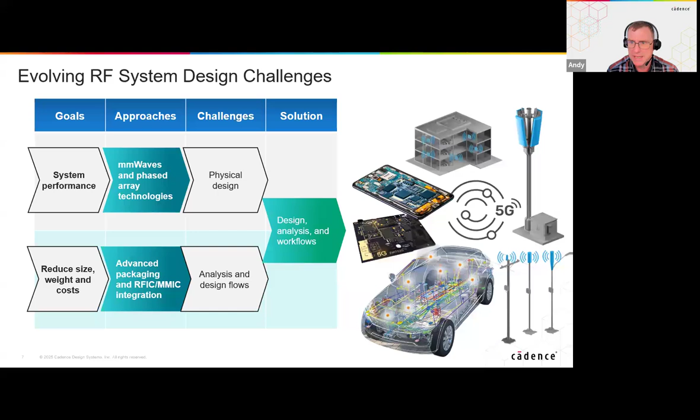Quite often I'm referring to electronic steerable antennas. We need to consider how we analyze those and the design flow that is appropriate for these to produce those physical designs, and to look at those physical designs and how they interact and perform once assembled and fully manufactured. And of course, what we're proposing today is the design analysis and workflows available to you from Cadence today.

Right now, the integration of Microwave Office, that's the AWR tool set, along with VSS, is part and parcel of the Cadence design suite. Virtuoso is for the silicon design at silicon chip level, quite often required for high integration for advanced node designs, be it memory or digital control. And Allegro, the PCB tools, is another platform that Cadence provides for RF microwave PCB layout, but also low frequency and power designs. And what we have today is an integration between all of those three tools working very, very nicely together.

That gives us the ability across all of the technical verticals, be it mobile communications, aerospace and defense, for example, to look at designing the digital, the analog and the RF circuitry, to be very process aware on the type of board technology, be that gallium nitride, perhaps for higher power designs, right through to PCB stacks, maybe on FR4, to consider that IC and advanced packaging, but also the routing around the board. It's technology independent. It's appropriate to use the correct technology for the correct requirement. I've mentioned gallium nitride there for high power, high frequency transmit chains, but also your very exotic laminates and multi-layer boards for high integration. And of course, perhaps the silicon devices, including the processors, the memory, the digital control.

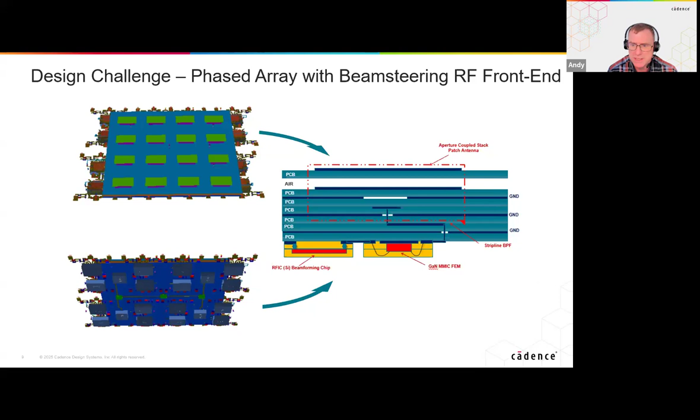In terms of the development workflow, one could start in one of two ways. Quite often, if you're designing from scratch, you'll start with budget analysis, and that's where VSS, the Visual System Simulator, sits. This is part of the AWR design environment, and allows us to do budget analysis, component selection and system architecture, looking at aligning the proposed system diagram and communications link going forward from there. It's in this tool that we do the phased array antenna synthesis, but that is synthesis. That is looking at the ideal performance of a perfect design without any of the degradation of the PCB board

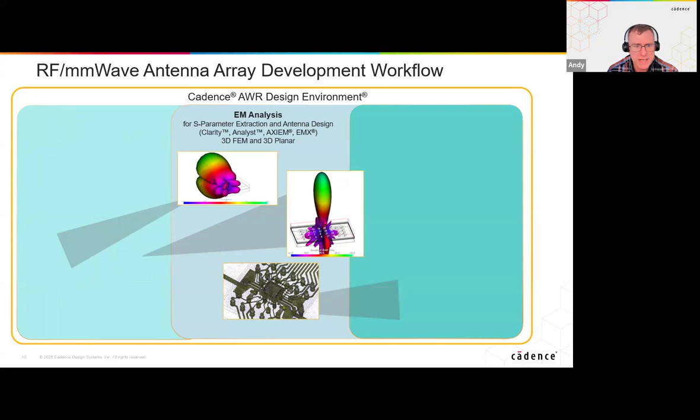sitting underneath. We can then take that flow into the EM world, either with planar tools or with true 3D FEM tools. Planar is AXIEM, 3D is Clarity and Analyst, and I mentioned a moment ago we could even do thermal analysis too, and look at the physical chips, the bond wires, the board stack and the solder balls, for example, in this lower picture, and look at the radiation patterns and the degradation in radiation going forward, and take that acceptable design and make a finished final layout using the tool to look at integrating surface mount components, the interconnect and the overall performance of this board design.

That's the flow one would take if you were designing from scratch, moving from left to right. And we certainly have an idea within Cadence that you shift left, you do more of this analysis up front before manufacturing the board, so that problems are found early on, resolved before manufacturing prototypes are produced, and you're able to design faster, in less time to market, and at lower cost than you might otherwise take if you make multiple prototypes and have to redesign those by finding the problems later on in the design flow.

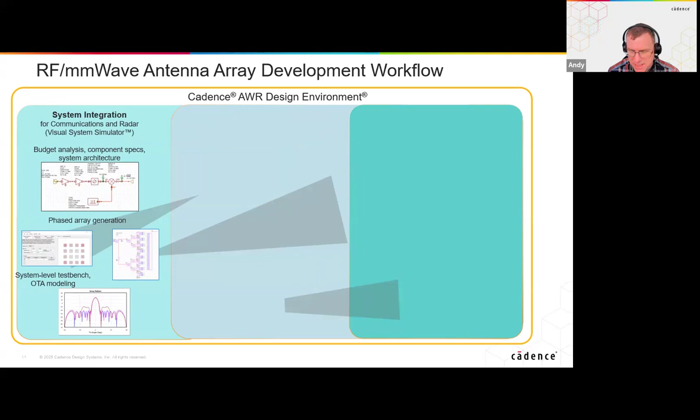Of course, there are customers that already have those designs, and we can import printed circuit board layout as ODB++, as IPC 2581, or as Gerber files. We can bring that into the design world. We can reverse engineer and analyze the electromagnetic performance, and we can reverse engineer the system performance back into VSS. The beauty of the tools that I'm proposing today is that you can work left to right for design or right to left for analysis. It works in both situations.

There are multiple design and analysis stages behind the development of quite a complex antenna array, getting to the point of PCB or package integration and those front-end RF electronics. But the flow that we're presenting today would start with the specification, the geometry and material definition, and the simulation and optimization of the proposed antenna array. We then take that concept and look to size that, the phased array wizard. This helps us to determine the number of elements, the orientation of those elements, whether we need to use a thing called gain tapering, adjusting mathematically the power transmitted to each of those elements dependent upon their position, and look at the far field analysis and beam angle steering of this design.

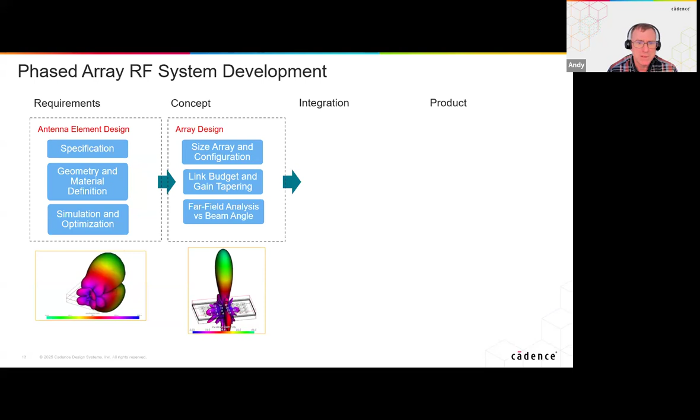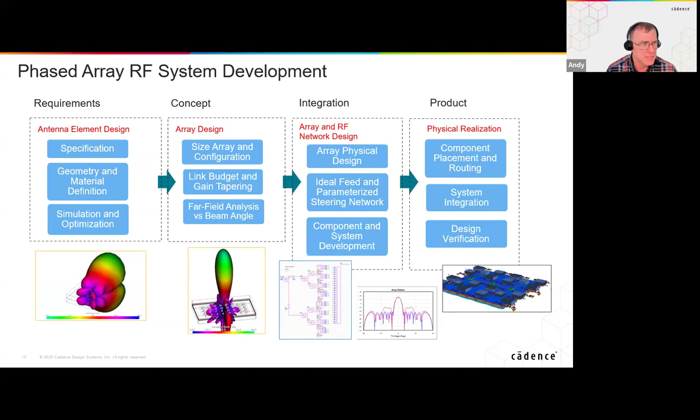We then need to integrate that into the product and make sure that we include not just the ideal feeds, but real parameterized components, maybe the steering components, the surface mount devices that will do the electronic control, and build this up to a final PCB board that we can physically produce. We're including there the component placement, perhaps S-parameter files from the devices that we've imported, certainly manufacturing devices that we can physically pick off the shelf and use going forward. We'll talk about more of those individually as we go through the slide deck.

So if we look at the tools provided by Cadence today, I've mentioned those on the left-hand side: the system planning tool, VSS, within Microwave Office, the material definition, the circuit level analysis, the parametric antenna design in the EM world, and the phased array generator. But of course, we do have Virtuoso for the silicon chip design. We can pull upon those silicon designs with a product called Virtuoso Studio RF and bring that silicon intellectual property, silicon IP, into the Microwave Office tool. So for example, if you were doing a beam steering IC, that could be included in the simulation at circuit level. And we can push those tools over into our PCB platform.

That's Allegro or Allegro X today. That also includes the Advanced Package Designer, APD, in order to continue the PCB design if it requires more digital design, more power or low frequency design over and above the RF sections. And of course, Clarity, the 3D EM tool, works with the whole flow. It doesn't matter whether the circuit level was designed in Microwave Office, in the EM tools inside the Microwave Office tool, or whether designed in Allegro and taken into account the full board.

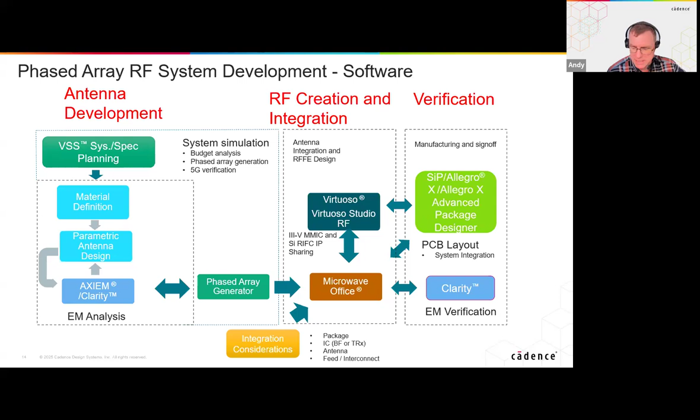So let's get on with our system specification then. Back of an envelope calculations, we refer to this in the UK here as a way of estimating the design in a very simple form and format. The table on the right is what we're going to talk to in just a moment, but we're looking at the receiver sensitivity, the signal to noise requirements, and in particular the path loss over something like a 200-meter link. I appreciate this is not massive distance, but it's just the vehicle to explain this particular design platform.

We're always limited on Earth with thermal background noise. Minus 174 dBm is the minimum you're going to get here, unless you go up into space, perhaps. And we add to that the bandwidth of the signal that we're working on. We're working on a 850 megahertz signal here, and this is up at 28 gigahertz. So we have our base thermal noise floor of minus 85 dBm.

850 megahertz bandwidth at 28 gigahertz that we're sitting at. This is the lowest power level that we would expect to operate in the system here based on Earth. We're giving ourselves a 6 dB offset for the noise figure, taking our noise floor to minus 79 dBm, and a signal to noise ratio of 4 dB before the antenna. That gives us a minimum received power of minus 75 dBm. This is dBs in milliwatts received at the receiver that we're able to have an operating link.

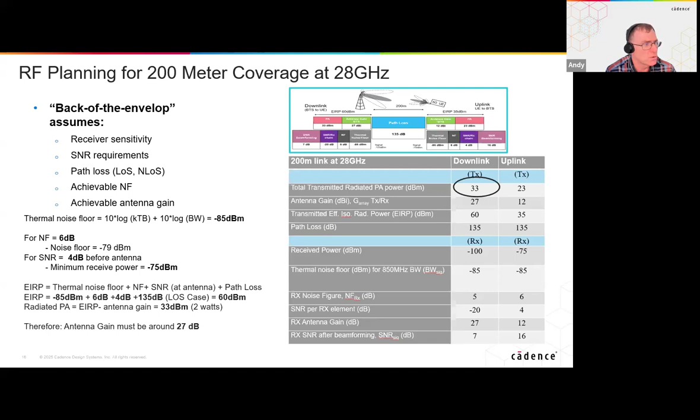So I mentioned VSS, the systems block diagram tool. That's where we start looking at this. And if you didn't want to do back of the envelope calculations, you're able to put these figures into our system simulator tool. So for example, here you will see, when I advance the slide, that we have our 135 dB massive path loss as the path loss.

We're assuming line of sight, but the model itself can look at multipath bouncing, perhaps from the ground or from atmospheric reflections. We have the transmit power of 33 dBm coming from our transmit amplifier, and the proposed gain here of the antenna of 27 dB. That's what we're hoping to get from our phased array antenna design. That will be clearly dependent upon the number of elements, the spacing, and so forth.

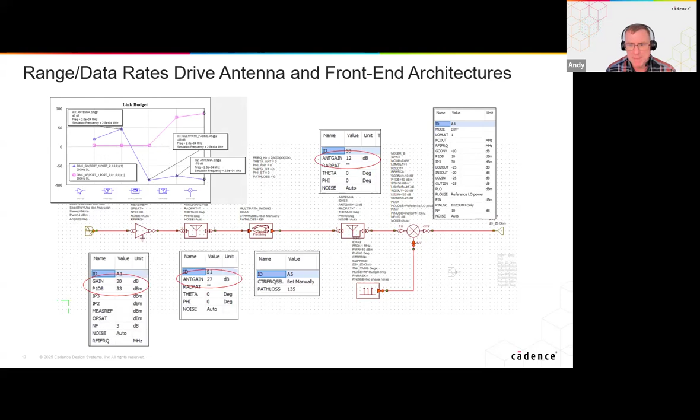We've also been asked about the data rate. At the moment, I'm assuming a CW signal, but we will look at one of the final slides, looking at a 5G live test signal going through this design, and the data rate would be set there. We've got some receive antenna gain in our receiving unit, and looking at the link budget analysis, we can propose that that link would work, assuming that we had 27 dB gain from our antenna. That's our magic number, and that's what we're going to work towards with the proposal for our phased array structure.

Now, within VSS, we don't need to use a single transmit antenna with ideal antenna gain. We could in fact import measurement data files. This is phi and theta, a measured angle into an antenna model, and sweep that. That's the one that we have on the right. Or we could have just an antenna radiation pattern that we can import and use that directly. These are behavioral models still in the VSS tool, but they're still relatively ideal. They're isolated antennas that are behaving themselves.

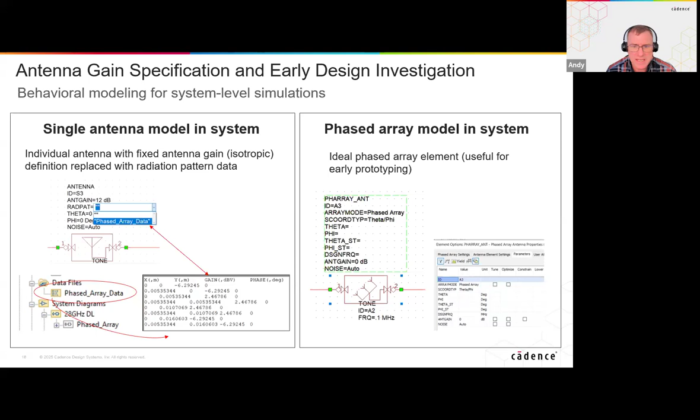What I'm going to propose in this webinar today is that we use the phased array wizard. This sits under the wizards branch in the project tree of the Microwave Office software, the AWR tools. And in that phased array wizard, we have various tabs that we step through. We step through those and look at the array control and general setup, the array geometry. And what we do today will be a lattice on grid, on a square or rectangular grid design, but it does not have to be that way. It could be circular. We could have custom coordinates for the arrays.

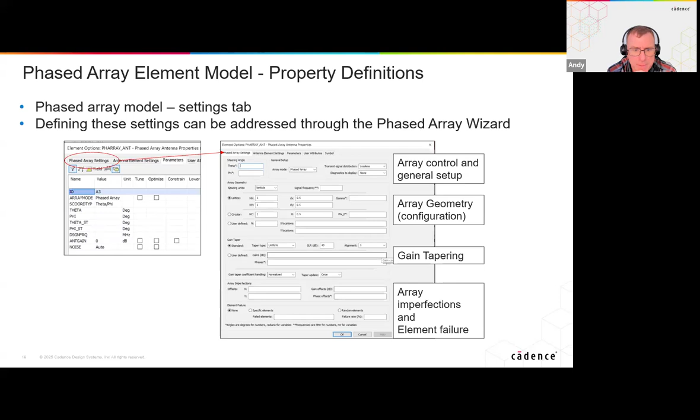And we can also look at producing gain tapers. There are normally three generic gain taper approximations that are used in phased array work. Obviously, uniform is the same power to every patch, but we have the Dolph-Chebyshev approximation or the Taylor approximation, where as we get closer to the antenna elements on the edge of the array, we start to reduce their power levels to help shape the beam. Again, you'll see some of that in future slides. Within the phased array wizard, we can even look at array imperfections and start to damage or disconnect some of those, either intentionally or random, to look at element failure and the beam shape when we're undergoing failures in the design.

The tabs allow us to set up, as mentioned, the lattice, the antenna gain for the individual antennas. In our example here, we're going to set that to around 5 dB per patch and have the multiple array elements multiply up and give us an overall antenna gain of 27 dB for hitting that budget analysis that we mentioned a moment ago.

The recommended amplification level, we had a question just now, for the chain can be input here. We have the ability to add that, and you'll see in a moment that we're working on 33 dBm drive power. That's 2 watts coming from the transmitter.

We click on the phased array generator wizard. We go through the analysis setup, and we propose the transmit and receive frequencies in here. You can see that we have the ability to look at importing antenna radiation patterns too. But more important at this stage, we're proposing a layout topology, and this is a 2x2. There is our individual antenna gain that we're proposing we can achieve per patch, and at the moment it's set to 5 dB. You'll see the single patch design in a moment as to how we achieve that.

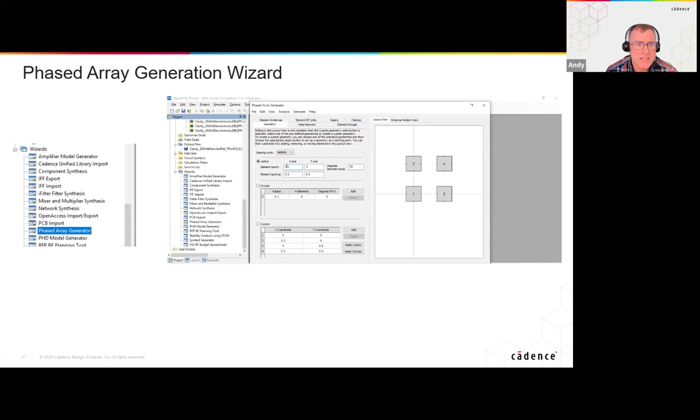Now we can go through that geometry, and as a 2x2, i.e. a 4-element array, we can look at the proposed synthesized radiation pattern, sweep frequency, and make sure that we're getting the expected radiation gain. You can see it's very light here at 21 dB. It's not enough with a 2x2 patch, a 4-element. So we increase that. We take that perhaps to a 4x2 or maybe even a 4x4 patch in order to achieve that overall transmit gain.

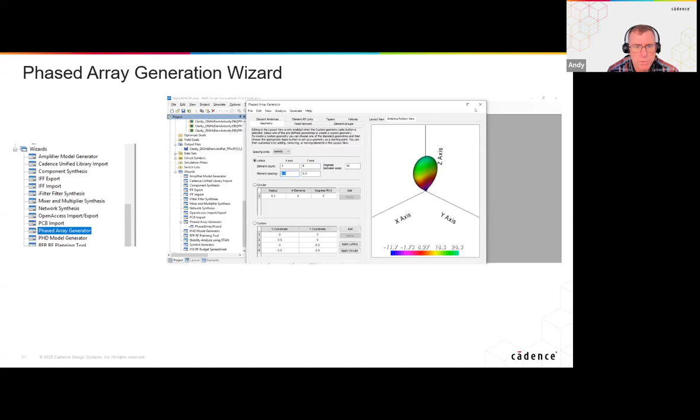You can see here that we can play around with the tapers in the synthesis tool and certainly focus that power on boresight, and you can see the antenna gain increasing as we do so, to the point that when we get to a 4x4 or 4x8 array, we are within our 27 dB gain requirement. So that video there was to show you, but I'll show you in the software as well in just a few moments. We're assuming an individual patch gain of 5 dB for this example, and that when we array that across, we get more than 27 dB, in this case ultimately relying on a 32-element, 4x8 array of patches if we include gain tapering.

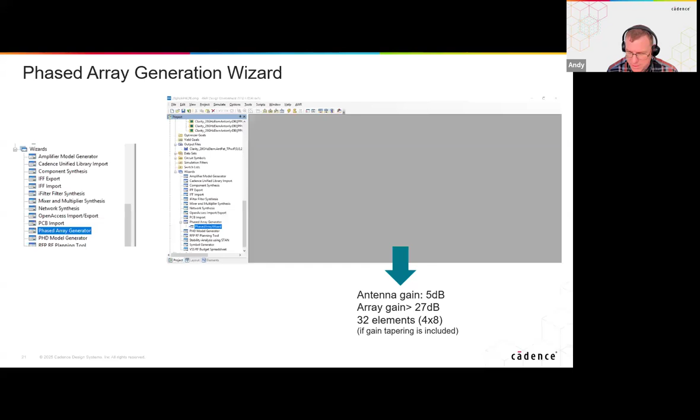Advancing through then, how do we do this design work, and how do we go about physically doing the elements? For the paper, this webinar, we're basing the individual patch antenna on a particular design that's proposed by this gentleman here, David Pozar, back in 1985. It's the idea of a slot-fed antenna. So at the bottom of our board stack here, we have our drive line. We have a ground plane with an open slot to help focus.

We have a focus patch on one layer, and actually to enhance the bandwidth, a second focus patch on a second layer above, but with air between the layers. It's quite a complicated stack of material. We can scale that to operate at 28 gigahertz, and there's actually a tool to help us set up the board stack of material that you'll see in just a moment. Now, on the live example that I'll show you in the software, I'm not going to be designing this one from scratch. There are too many variables to get wrong in a live demonstration, but I will show you a single patch antenna and how we set this up.

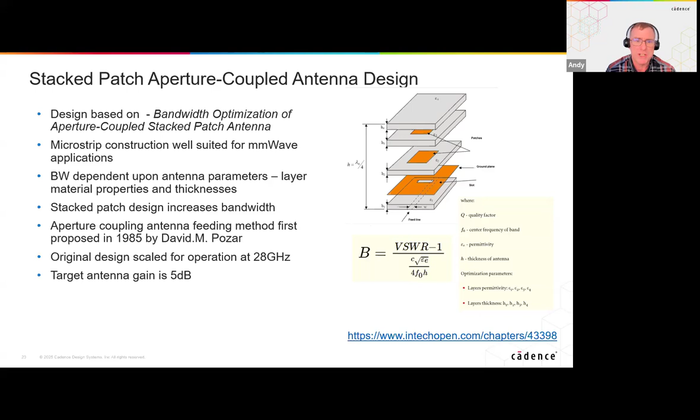So in the real design, we have a multi-layer, multi-PCB stack of material. Here you can see a cross-section of the feed line coming from our surface mount devices on the bottom side of the PCB board, a gallium nitride amplifier, and beamforming chips all controlling the beam power and direction, feeding through to an element here that is effectively our transmission feed line, feeding through that slot that I mentioned in the ground plane, our bottom patch, an air gap, and our top focus patch. Now this is on our stack of board material you can see here. And what I've done in the actual project is I've set as a variable the air height and the height of this last substrate layer, so that we can optimize those. They've been set to H1 and H2, and indeed we've got a large air gap behind the bottom side of the board. So it's important to get those right and include those.

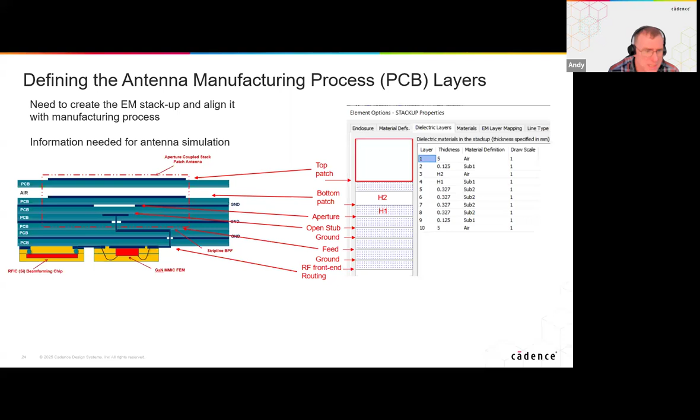There is, as I mentioned, under the tools menu, a create new process, and that allows us to go in and set up the PCB stack of material. We simply go into the software, we start this new process wizard, we define the number of layers. Sorry, it's quite small here, as perhaps an 8 or a 10 or a 15 layer board. We explain and set the various permittivity layers.

So you can see here I've made my air gap, and indeed we can actually optimize some of these layers inside the tool. That wizard will generate all of the interleaving via models, both as a solid through via, but also all of the independent via lines that go between layers, and give us the option to choose those in what we call the process design kit. That really is for another webinar, another day in terms of its own setup.

If we come down, we've got a small video here talking through again how that's done. So we go in and specify the parameters that I've mentioned. Those parameters can be set from the create new process. You'll see it here, and we can change the permittivity of certain layers. We can add metal conductors as ground plane or not, as the case might be, and define those via holes as we go. So that is our starting point for the PCB stack within Microwave Office. That gives us the ability to use all of that technology board stack as proposed by the original single element antenna array design.

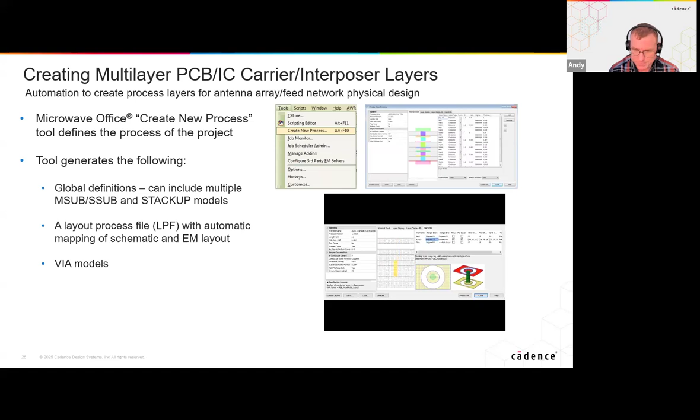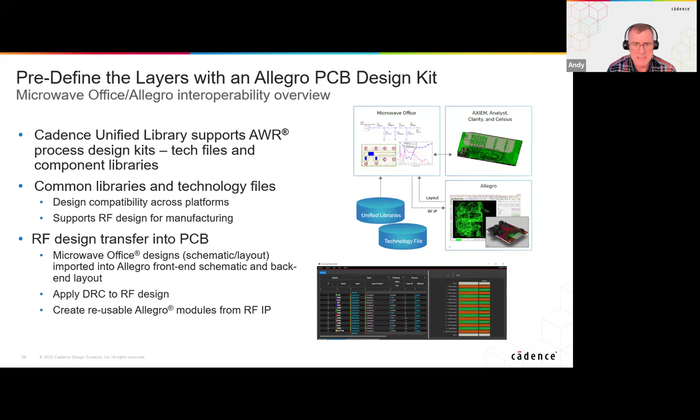Now, of course, Cadence do have PCB tools. Allegro is our PCB package, and we can, of course, interface into that by reading in the unified libraries from Allegro. Having exported the technology file, we could bring in the board stack of material from Allegro directly into the PCB tool. That allows us to design inside Microwave Office based on a printed circuit board stack of material, the properties, the thicknesses, from the Allegro tool in the first instance.

So let's go on and look at the individual antenna. That's the one I've just mentioned in the paper by Pozar. The idea of an upper and lower patch, the air gap, the aperture feed. What we've done here is we've put together that design in an EM structure, an electromagnetic structure. It's planar in nature, so there are layers, so we can use a method of moments tool in our product that's called AXIEM.

Although we've set design dimensions for the patches, you can see here on the screen that we've grabbed those elements and we've set up parameterized optimizers. These are just parameterized modifiers that allow us through the optimizer to change their values. And hopefully you can see on the right-hand picture here, that's both the length and width of the patch, but also things like the size of the slot. And on the bottom corner there, you can even see that we've optimized and set the offset center of the feed transmission line under that slot.

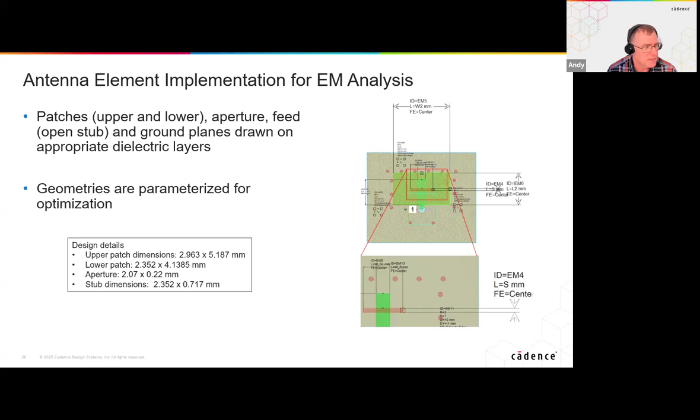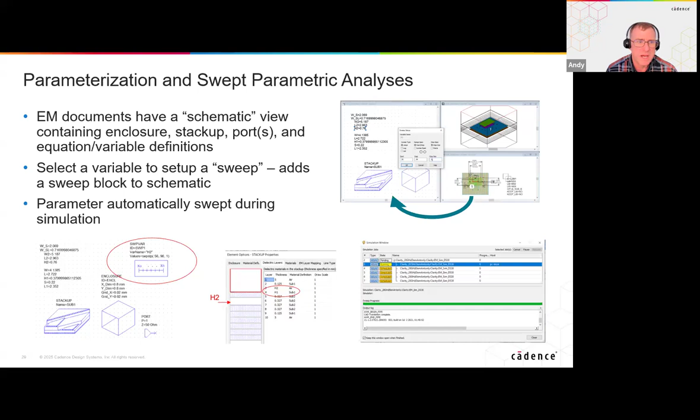Now in 3D view, you can see it here in the AXIEM tool. We've got the layer stack of material from the Create New Process wizard. We've got on the bottom right-hand corner the optimized elements that have been set, and we've set up those parameters in the EM tool to allow us to optimize them. We have various optimizers inside AXIEM, but the artificial intelligence one, we've called it the pointer optimizer. We'll use different methods, and we can either do multiple point sweeps and extrapolate the best answers, or we can let the optimizer hunt down the best performance.

Now that's not just the case on the top of the patch, but also on that feed line on the bottom lower layer. And you can see that once we've run that optimizer, we were aiming for 5 dBs of gain from this patch. In fact, we're generating 9 dBs of gain from a single patch, more than required for our antenna array. That might mean that we can get away with a 4x4, a 16 element patch, rather than a 4x8, a 32 element patch ultimately. You can see here that we've got reasonable return loss across the band of 9.5 to 12 dBs. And these results are shown for an air gap height of that air layer of 0.76 millimeters.

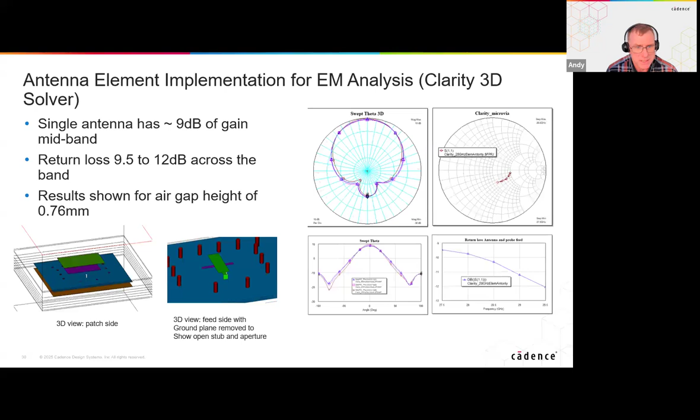With the ability to speed up the electromagnetic analysis with parallel simulations. So at the moment, as that standalone design was run on one computer with one license, you're looking at about 52 minutes to solve that with the optimizer and come up with a solution. That's running locally on one machine for the planar tool.

Or we can actually run multiple licenses on multiple machines, either on the cloud or on a compute farm on site, on premise. And that drops our simulation time with this planar solver, even with optimization, down to around 6 minutes on the compute farm that I had access to. This is running effectively 3 licenses over 6 machines. That's 18 licenses or 18 sets of tokens. But the solve time is an order of magnitude faster.

This isn't taking very long to solve that critical problem. And we end up with a design, as you saw there, of the patch. Now that was done in a planar tool. We can, of course, copy this directly across and run this in the 3D FEM, finite element method tool, Clarity, or today Analyst in Microwave Office.

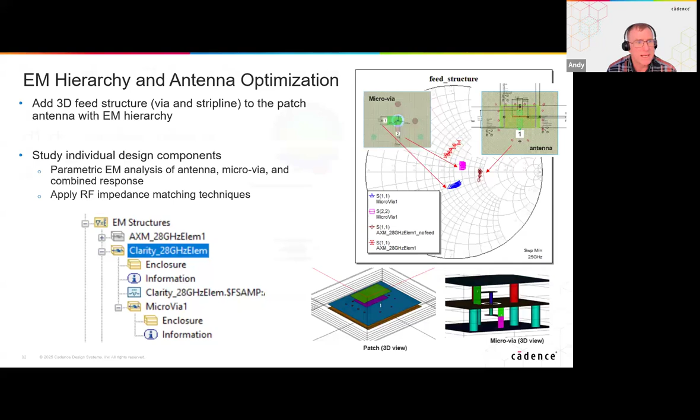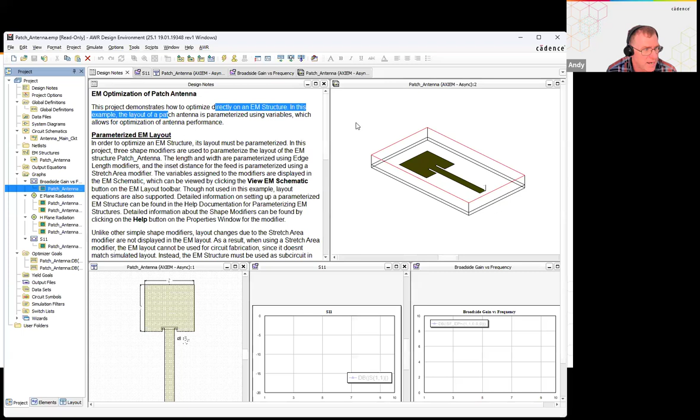Now, because I like demonstrating the software live, let's jump to what you can see now, which is Microwave Office. Here is a planar patch antenna. It's not quite the multi-layer design. It's simply an edge-fed design. We've done this by drawing shapes. The shape modifiers that I mentioned, we simply pick up the shape and draw parameterized modifiers against any of those design elements. Once we've got that set up, we can simulate that.

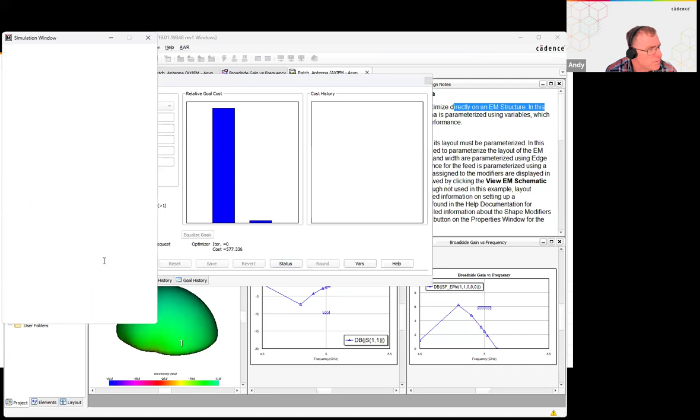That simulation is running on my local machine while I'm sharing my design, and you can see immediately real-time simulation results from that design. If I go and view all here, you see the radiation pattern that goes above a ground plane and the values here. I have set up optimization goals, so we can go through the simulate menu and into the optimization. As I mentioned, we do have artificial intelligence under the pointer. In this case, I've got a grid search. And to give you an idea of the simulation time live on the webinar, I've hit go.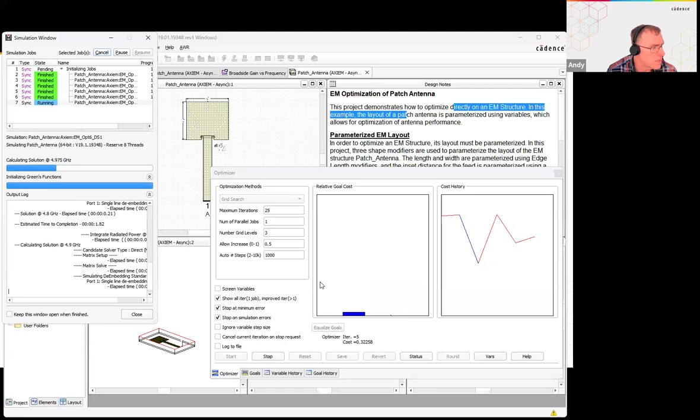We're doing multiple frequencies. I appreciate it's a slightly simpler patch, but you can see the software now hunting down the results that you see here on the screen. What it's doing is changing the size of these parameters. And hopefully you can see this patch dimension changing as we go. It's now done its 5th iteration. And I asked it to stop at the best value of performance. So here it's set to stop at minimum error.

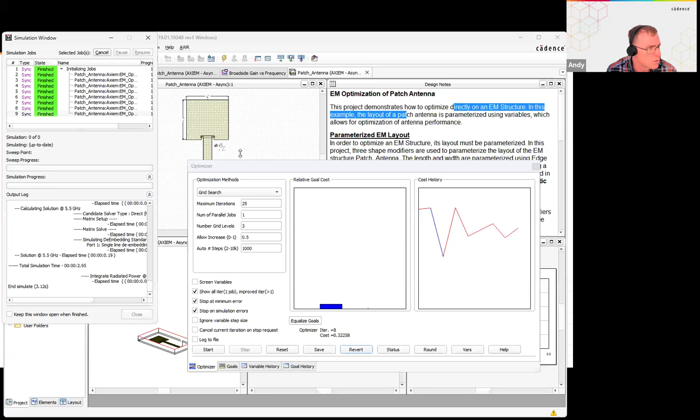So when we stop here, you'll see that what was off-grid in the first instance is now designed to be a nice 5 gigahertz patch. On the webinar material, we simply centered this around the 28 gigahertz frequency point. Here's the final design with its given dimensions. If I revert back to the original, you can see that there are different dimensions, and that was originally off frequency in the design that we had as I brought that in.

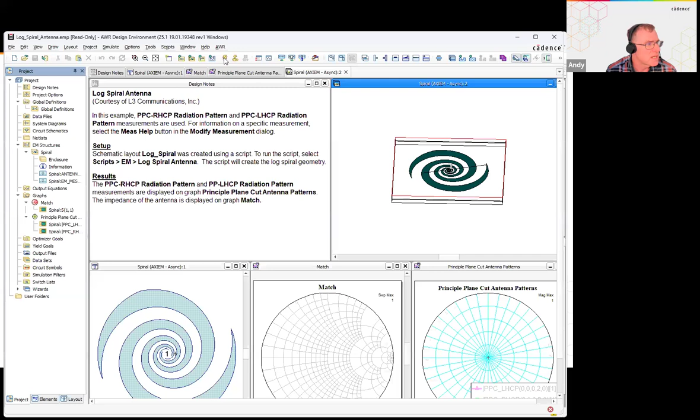Now, I think we had a question about antenna radiation pattern types. It just so happens that I've got another antenna here. This was a log spiral that was done, an imported design. And in this case, when we run the simulation, once again, live for you during the webinar, I've got that set up. Apologies, because I was using multiple solvers.

You can see that we can look at the radiation patterns, and those radiation patterns give us the ability to look at polarization, at transmit radiation direction, and match of this antenna. So I hope that's useful. Let's come back to the slides.

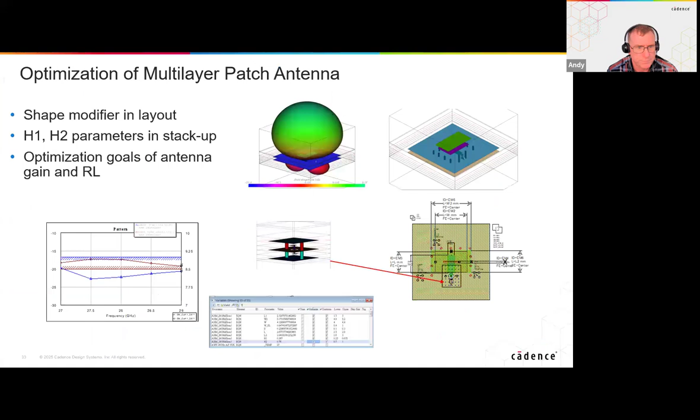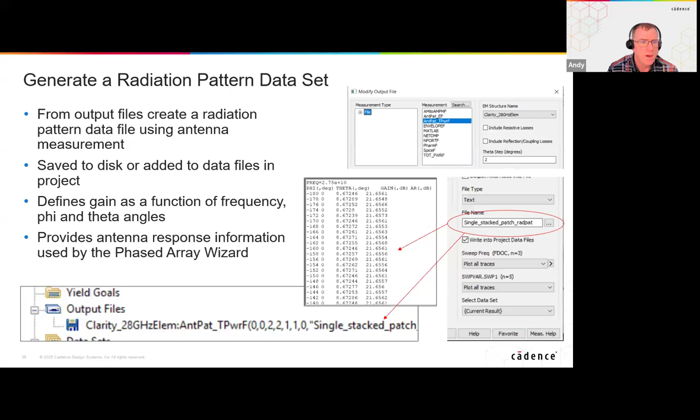We'll talk now about the phased array generator. Once you have that single patch done, what we can do is either generate a radiation pattern from that and use that as data inside the wizard itself, or we can simply go away and use that wizard. You saw a video slightly earlier on, and set up that patch array to look at the performance on the synthesis side of the tool.

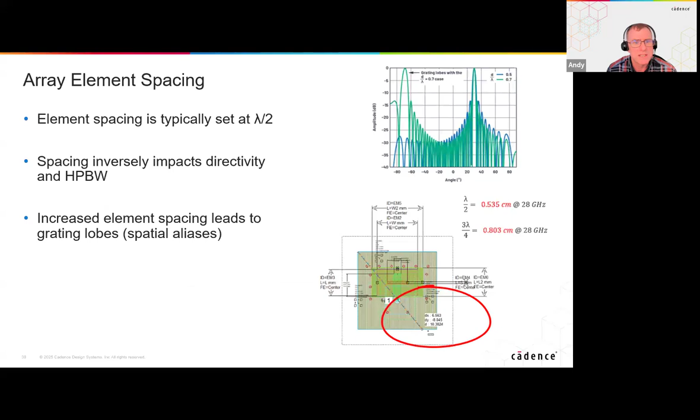Now, we do have to have some thought about grating lobes, we call them, spatial alias. This is dependent upon the wavelength of the patches that are separated, but the synthesis tool gives us the ability to trial those. And it's very, very simple to drive. Let me drop back into the software.

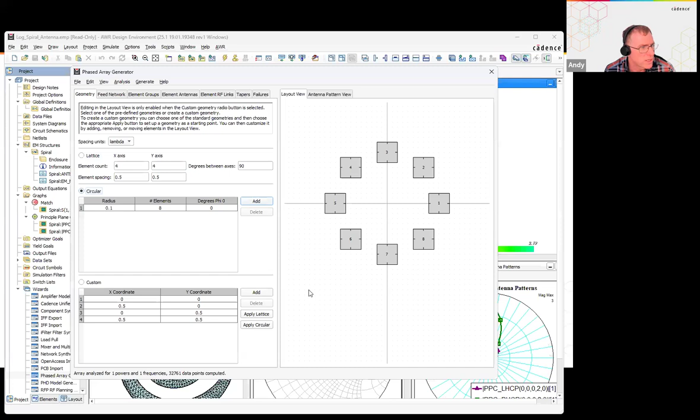Under the wizards branch here, you see that we have the ability to go into the phased array generator wizard. That gives us the option to, although shown as squares here, I'm going to use my circular polarized log spiral antenna. Decide the number of elements. They don't have to be rectangular, as I mentioned earlier on. They could be in a circular pattern. They could be on a custom coordinate location.

And whilst we're synthesizing here, having added the frequencies and other information that we need to edit, we can in this tool start to look at the radiation pattern. And that radiation pattern gives us the ability to look at the synthesized performance of this design and look at the idea of adding tapers and taper control. Could we focus that beam with mathematical approaches? Most definitely. Could we look at using a better way to focus that beam? The Taylor approximation of the way that we feed the power gives us the best concentrated power on boresight.

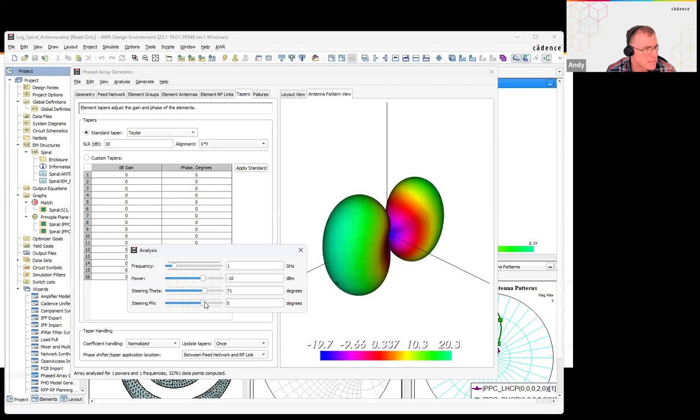And what about then when we steer this beam around in the synthesis world? Can we look to steer that in the X, Y, Z directions? Most definitely. And this is all under the synthesis side. But once we've finished the synthesis, we simply go into the generate menu, generate a schematic layout. This will populate this with AXIEM.

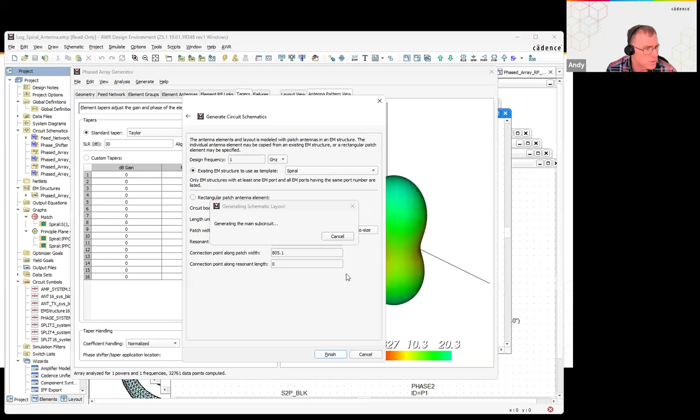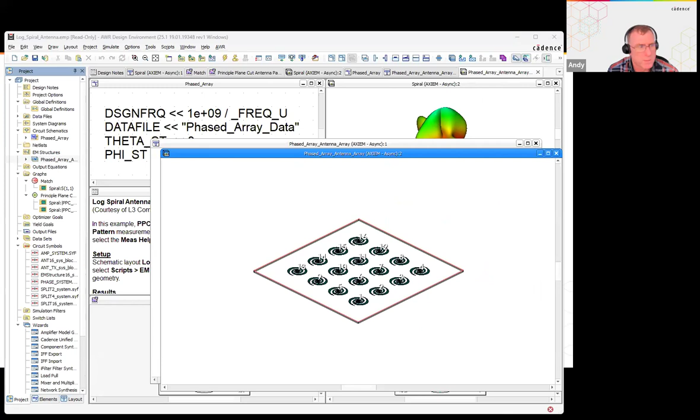And if we have underneath a design that we've already generated, you saw my log spiral antenna just a moment ago, we can use that as the individual element. And the minute we finish this wizard, the software goes away, it automatically populates the AXIEM 3D planar method of moments tool, generates the measurements that we require, and it comes back with effectively a final solution. Apologies, I've got some windows on the other screen just here. And you'll see that sitting under here, we have a phased array design in 3D on a 4x4 grid with our log spiral antenna. So very, very easy to drive that synthesis tool. Let's come back to our slide deck for now.

Once we have our proposed antenna array, we need to go away and consider how we drive that electronically. I mentioned that we were using a 33 dBm or 2-watt amplifier chip. I've gone away and I've found one of those devices, in this case from Qorvo. You can see on the left-hand side here, we've got transmit small signal gain of 27 dB. We combine that with our antenna of 5 dB gain. We get close to our 30 dB radiation that we need per patch. And that is imported either as S parameters or as a non-linear model for simulating in Microwave Office. We can import the package outline, and that package outline becomes part of our feed network.

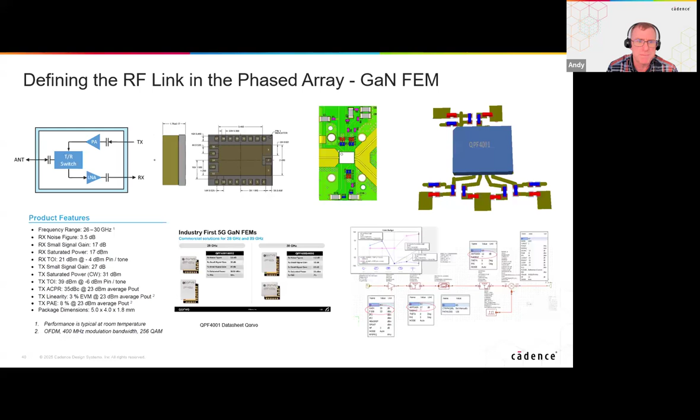Not an ideal amplifier in VSS, but the feed network inside Microwave Office. We can do the same with the transmit receive switches and import their Gerber outlines or ideal profiles and start to feed those together with the circuit level design, where we import the surface mount components for the electrical control of this antenna.

What I'm proposing doing is in the proposed electrical schematic diagram, rather than have ideal switches as behavioral models, we're replacing them with the actual device. We're using routing inside Microwave Office, or routing between the devices, to draw our PCB tracks. We're using surface mount splitters, or perhaps drawn splitters in the topology of the board stack. And most important and critically, we're taking the feed, you can see on the bottom right corner here, to all 16 antennas and treating that as one lump of interconnect that we throw at the electromagnetic simulator.

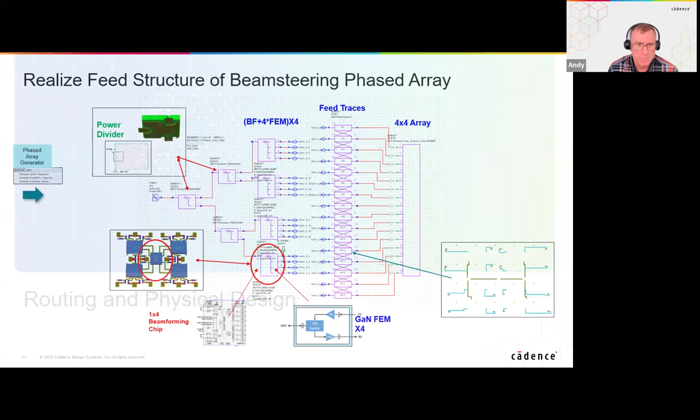What that will do is pick up the coupling of those tracks, their interaction with each other, and that can also then be included in the overall design as an S parameter file, picking up the interactive coupling between each of those patches and the feed lines that are going on. So that routing and physical design, as I've mentioned, we take out to an EM tool.

It would automatically put on the ports. They're no longer ideal transmission lines or strip line models in the circuit level simulation tool. They really do have material loss, roughness. They are buried inside the PCB stack. And if we have 16 of those that all couple together, we do find that there is a return loss.

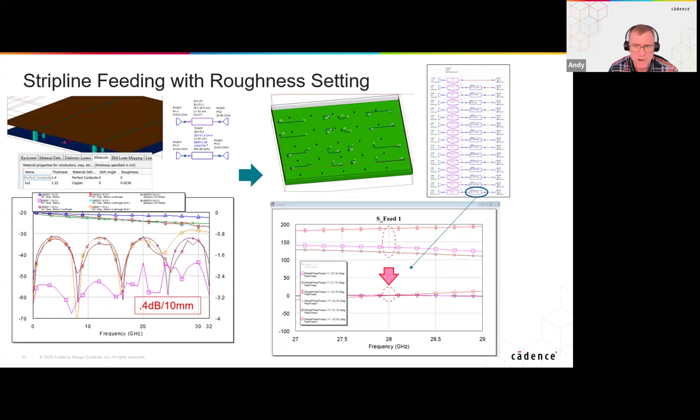We can look at their phase response to make sure that we're getting the right phase, the appropriate patches. And you can see here a return loss of under minus 30 dBs across our band of interest, in this case around the 28 gigahertz mark. We do have some loss. This is real copper. So on the right hand side there, you can see that we've got about 0.4 dBs of loss per 10 millimeter strip of the transmission line track. That means that we have to be careful how long these lines are on the control.

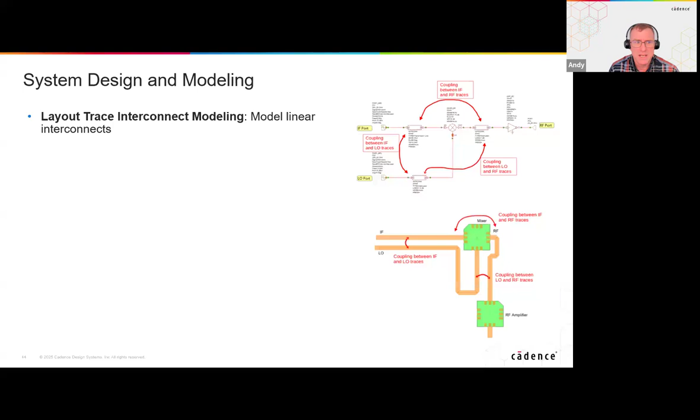Now, just to mention, if you were only using the system simulator VSS, we do even have interconnect models in there today within the systems tool. This can pick up the EM simulation as an S parameter file, and it would include the cross coupling between tracks, for example, the IF and the LO feeds, the RF output trace that might be driving into our RF amplifier chip and how that couples back to the local oscillator. And the S parameter file from that EM tool can be used purely in the system simulator. Remember, of course, that's a linear only interconnect that we're including in the simulation there.

So let's move on to the simulation results. We're coming towards the top of the hour. I've spoken about the individual patch. I've spoken about some of the control electronics. Let's look at the final board as we close out this webinar before we take some questions.

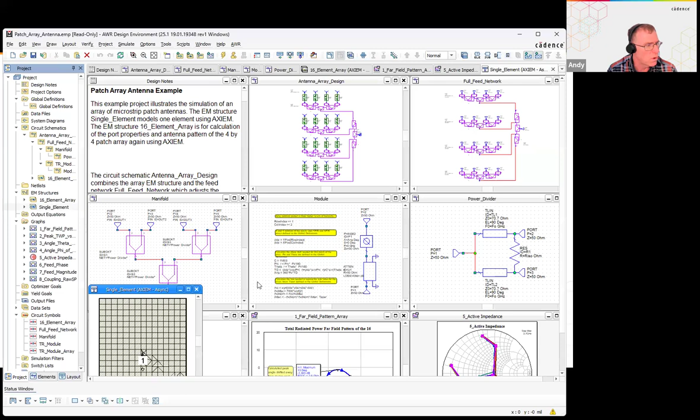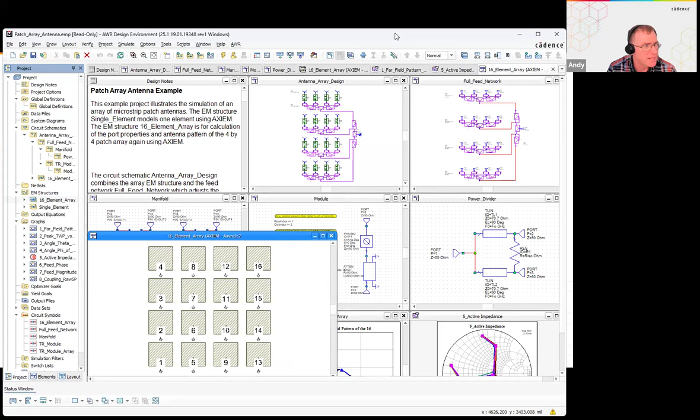This example is taking a very simple single element array patch that you saw a moment ago. This was the feed one that I had. In this case, not fed from the edge of the board, but fed from a port in the center as a coax feed underneath the PCB board. What I've done is I've used the phased array generating wizard to go away and generate effectively a 4x4 array patch, very similar to what we have here, but just with a simplified single layer patch. This is one patch on one layer of PCB board stack. Let me just switch off this 3D animation for a moment.

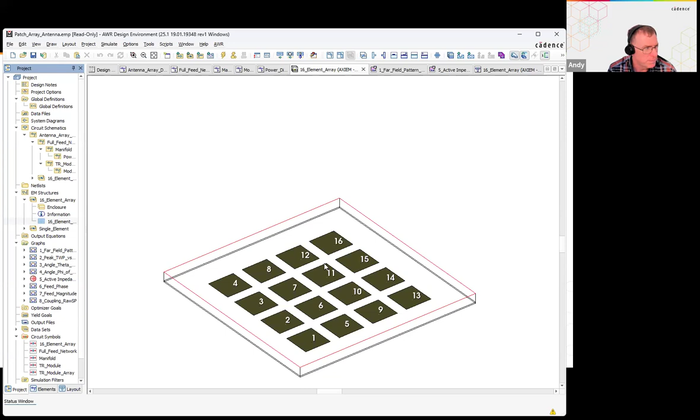Right click, toggle this off, and you can see our board stack on top of one microstrip layer. We have no air gap here. We have no fancy feed transmission line through a slot. This would not give us 5 dB antenna gain in this design per patch, but it is a nice vehicle for me to show you how we run the design.

Now in here we have at the top level a circuit diagram that uses the EM structure as a subcircuit. That subcircuit, in fact, that's the wrong one. Let's show you the right one. It's this one here. That EM subcircuit is the 4x4, the 16 array patch that is used as a subcircuit, and we're driving that from Microwave Office with a real drive signal, in this case plus 40 dBm.

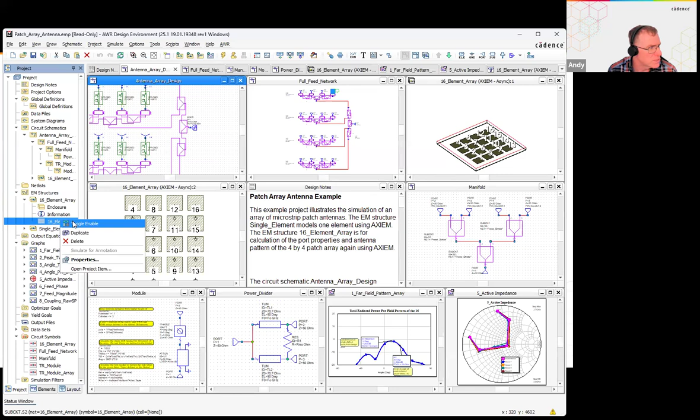The clever thing here is because the two tools are in the same platform, when we look at the 3D animation pattern of this simulation result, we can right click here, add annotation. And the annotation that we're adding is a planar EM 3D current, field, or annotation pattern. So those allow us to add, as you can see here, the pre-simulated antenna radiation pattern off the board at circuit level drive conditions.

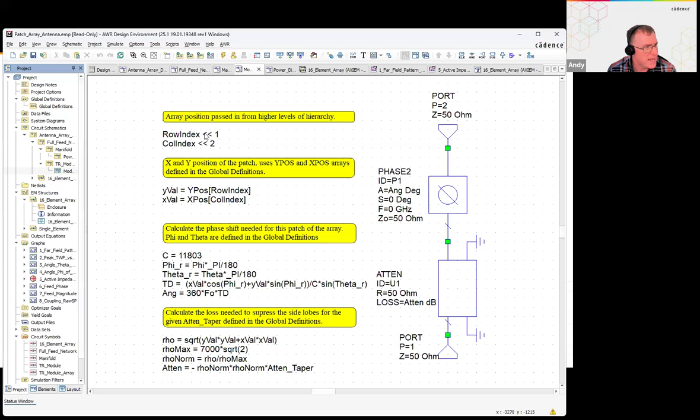Now that's critical because at the circuit level, we're controlling the phase into each of these elements. So each of these elements here is a control phase block, and we're controlling it by the X and Y position of that particular block. So there are 16 blocks in the design. We're controlling the X, Y position in terms of the phase, theta and phi. And what that means is we can, in simulation, not synthesize the performance of this antenna, but we can actually simulate and analyze. That's very, very different.

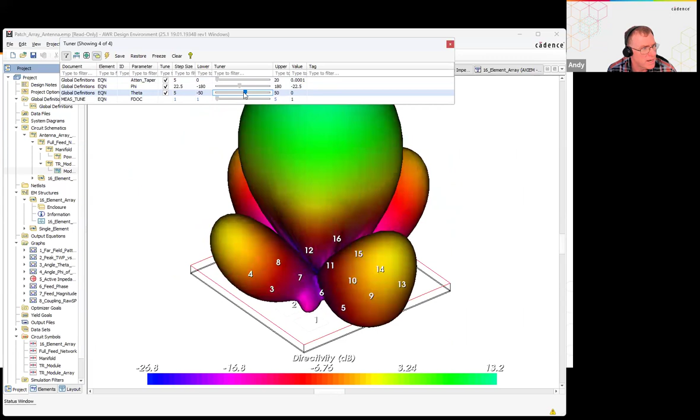The analysis allows us to sweep that beam as I change the values of the phase to each of the antennas, and you can see the side lobe patterns changing, the beam steering in both theta and phi if I spin this around. And we can look at the radiation pattern. As I've mentioned, this is not on a complicated board stack with the focus patch or the air gap. We are not getting 5 dB, and the overall 4x4 is only giving us 13 dB antenna gain from this configuration. This is actually a built-in example.

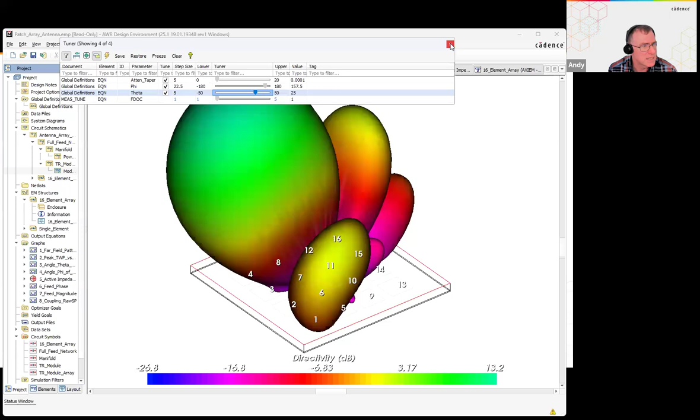Under File, Open Example, ladies and gentlemen, you can get access to this element in the software as we ship it. The File Open Example brings up something like 400 plus designs. And if you type in the keyword here, antenna, we have 27 of those. The one that I'm showing on screen now is this patch array antenna as a simple patch, but you'll also find one there that talks about the phased array generator in the systems world and that element, and the phased array file-based array antenna that we can open and show how those work. The log spiral antenna is also built into the tools that I showed earlier on, as is the standalone patch antenna that I use for optimization. So all of those are in the software already, available for you to explore and use to your heart's content.

Now, I spoke about that radiation pattern being run in the planar tool. That works very nicely when you've got planar elements, but of course, planar elements treat things like plastic cases as a complete infinite layer of plastic. They can't separate out in 3D the various air and plastic package layers. So this is an approximation using the planar AXIEM tool. Why do we do that?

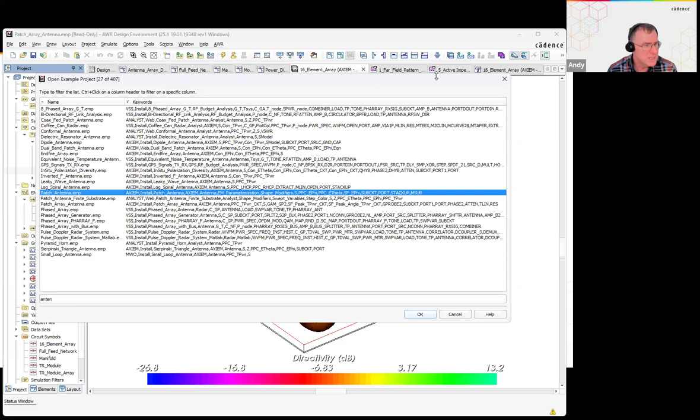It's fast. The simulation time that you saw for that last design, if I bring that back up, was typically around about 3 minutes on my single laptop with 8 cores. So it's a very, very fast design, even though we're looking at simulating a multi-patch array and looking at steerable beam conditions. What we really want to do is throw that design to the 3D tool.

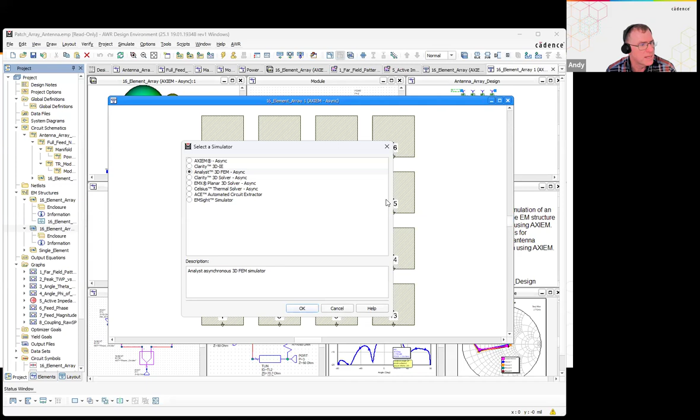You simply copy and paste the design. Again, back in the software, what you do is you literally drag and drop this design. It gives you an immediate copy. You right click on the copy, go into set simulator, and you simply then choose, instead of the AXIEM Planar tool, the Clarity 3D EM solver. That's it. You'll see that from there, we end up setting a box around the elements. Oops, sorry, I've chosen Analyst. I did wonder why it wasn't allowing me to do that. It sets a box around the elements.

It would set this up in a 3D tetrahedra solver and give us the results from that. No further changes, no import or export of files. It's very, very simple to drive the 3D tool. And I have a slide for that. It does, of course, take a bit longer to run.

Of our 4x4 patch running Clarity as a true 3D solver, you can see the return loss and the transmit losses from the patch array, and a similar radiation pattern. It's just a slightly different graphical interface here.

To give you an idea of solve times across multiple cores, with all of the layers and all of the surface mount components resolved down to a very, very fine level in terms of the FEM solve mesh, we're looking at around a 50-minute simulation time on a 20 gigabyte memory compute farm with 96 cores. I appreciate that's a large number of cores. It can be done on the cloud or on a compute farm, but 50 minutes simulation time for this type of integrated design is really quite impressive.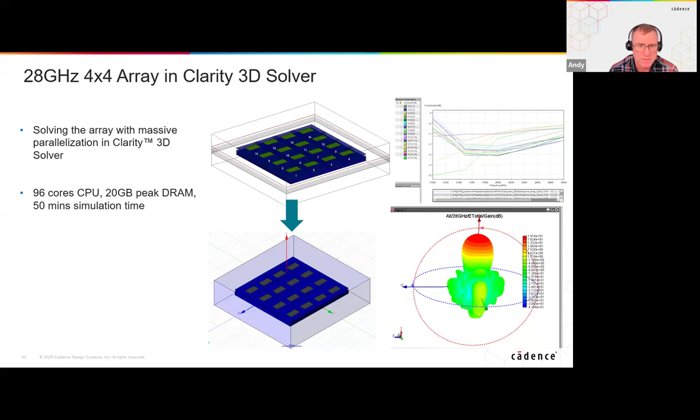So finally, we wanted to look at increasing that design, improving it, going to our proposed 8x4 array design. You can see on the bottom left-hand corner here, we've extended the hierarchy to include one switch. That switch is shown here on the bottom left corner as a green element off board, but that would allow us to start to cascade these 4x4 arrays.

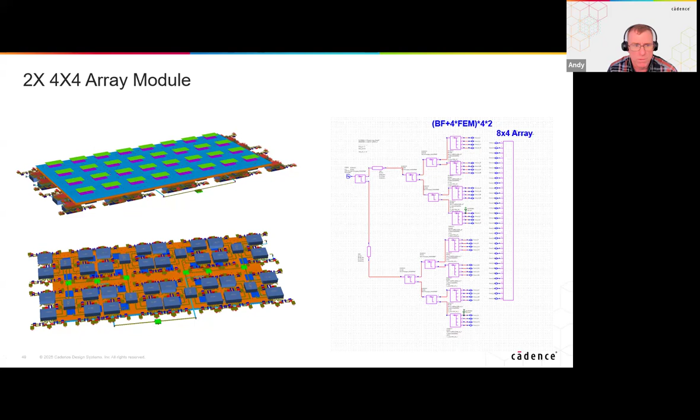And the beauty of that then is that we can look at radiation patterns of the 32 patch array, either on boresight with its interfering underlying signals underneath the board, or as you can see on the right hand side, if we injected and ran two signals, two individual users on different angles, can we simulate and propose and look at the power radiation from those angles and see that we're getting the expected transmit power. Remember that we now have doubled up the number of patches. We're expecting more than 27 dBs of gain from these antenna arrays. So a very, very powerful way of doing this type of design work ahead of ever producing prototype material, ahead of spending money and getting some results.

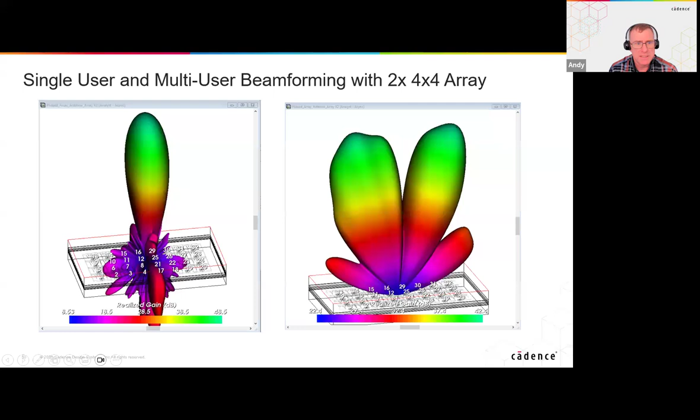What I've completely ignored is any type of filtering on the design to enable us to ensure we stay within specification of the band. So we had an earlier question on data rate. This is where it does become important to include data rate and modulation bandwidth in the system simulation tool. So I hope that answers that question too.

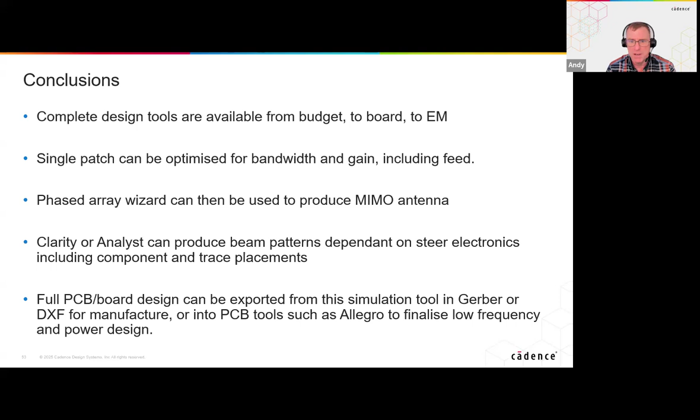I was showing you it with a tuning tool, but you can do that with sweep variables to cover all possible phase angles. And ultimately, of course, from that PCB design, we can export this into the production world through Gerber and DXF masks. Just to show you quickly, I had that full design in the software platform. Here is the 3D structure for the EM patch, all optimized for the feed line and the two patches with the air gap above, and the design that was used to do that with the parameterized shape modifiers.

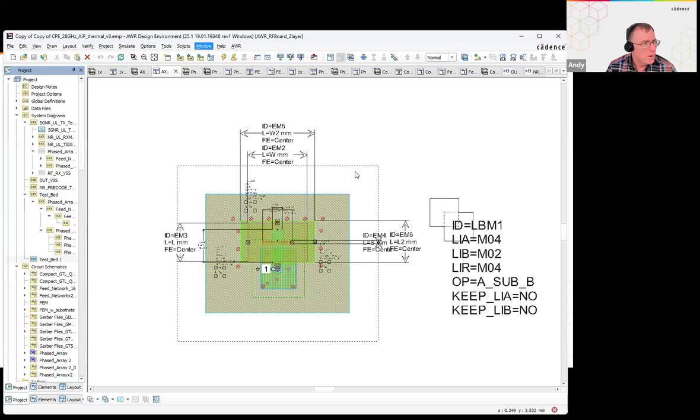This is all in one single project within Microwave Office. We have taken those designs, we've arrayed them across, we've added the surface mount components to make sure that we've got those amplifier chips and the electronic steering control chip. We can view those in 2D or 3D for looking at those elements and how they're grounded. This is part of the bottom of the board for one segment of 4 patches.

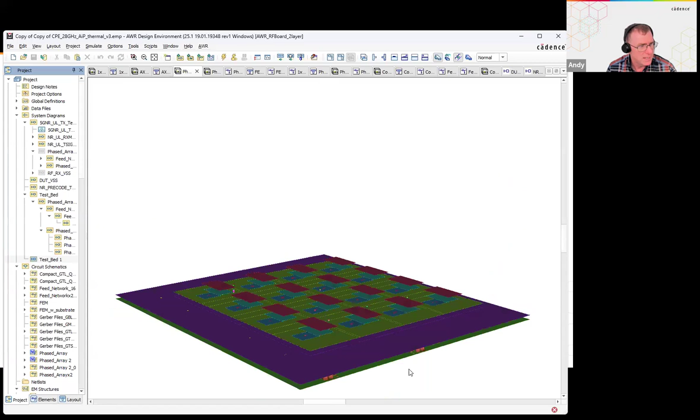And we've even taken that design and arrayed it across, not just for effectively the patch that you saw in the visuals, the 4x4 that does solve our radiation problems and gets us to the required transmit gain, but also in this same project we have the 4x8 patch, and that was simulated and solved in Clarity. I certainly won't do this live on the webinar. It takes around about 50 minutes, but that was looking at the feed that we sent as an ideal 4x8 patch array into the Clarity tool, all in one project.

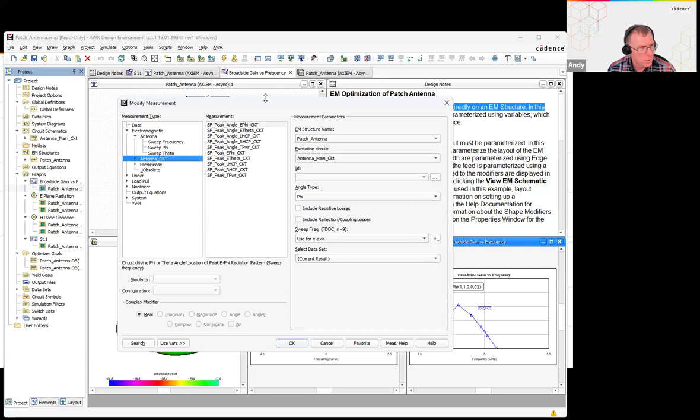We can look at swept phi, swept theta, and critically, the antenna measurements under circuit drive conditions. Remember with that patch array, I was driving from a circuit level signal. It's important to plot those with a given circuit drive level, so that's quite critical there too.

A couple of final questions. In the antenna simulation, does the phased array calculator consider or calculate the mutual coupling between the antenna patches? Yes, it certainly does. I don't know if you spotted - again, I'll try and do this very quickly.

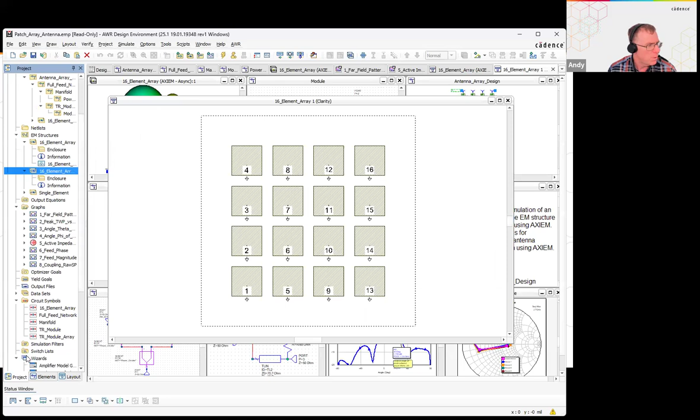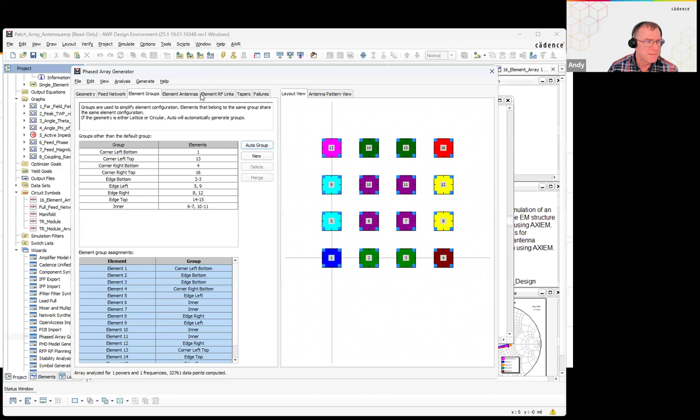In the phased array antenna design itself, when we come into a multiple patch array, we group those antenna patches, and what we do is start to group them. If I do a 4x4 and look at the element groups, I wonder if I can show you that here - I don't think I can until I auto group them. Let's see, there we go. You can see what it's doing is finding those that are at the corner and treating those uniquely.

It's finding those that are along an edge. These are dark green and treated as a pair of antennas and the way that they operate. And it's finding those towards the center of the array. It does this all automatically.

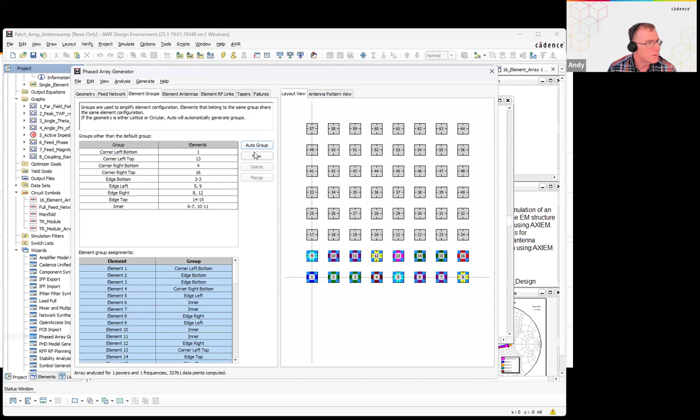And the inter-element coupling is included in the synthesis. Again, let's go into that element group and auto group. You can see how it's treating all of those in the center of this 64 patch array as purple, treating them the same in terms of coupling and radiation of elements around them. So yes, it does, but it is critical to include post-analysis, not synthesis, but post-analysis.

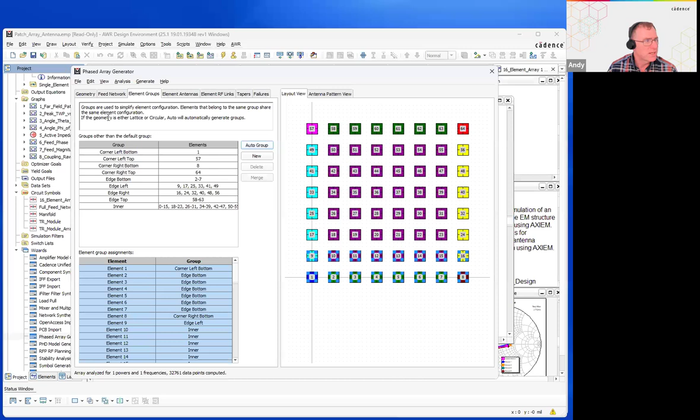Thank you for that one. And to conclude, thank you very much to those that have attended today. I hope it's been a useful presentation. I look forward to hearing more from you in the future. Thank you once again. Thank you Andy.